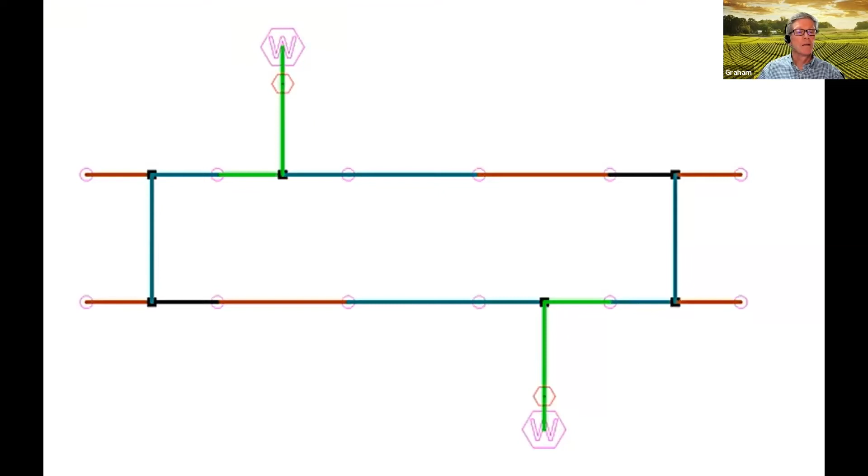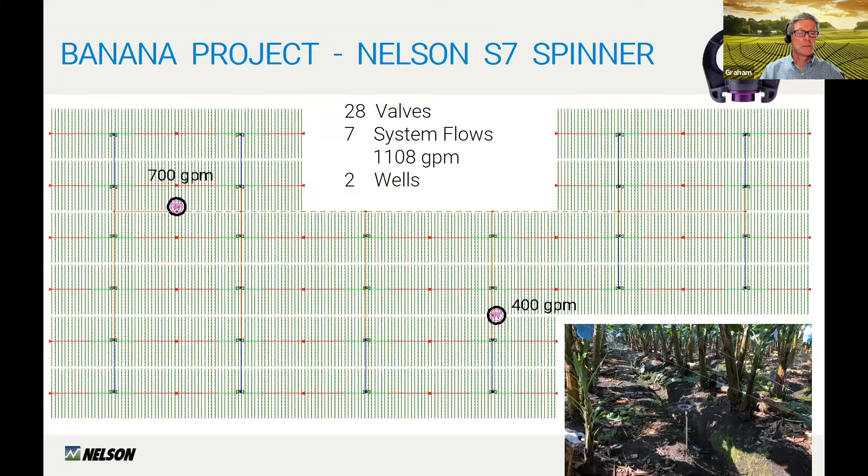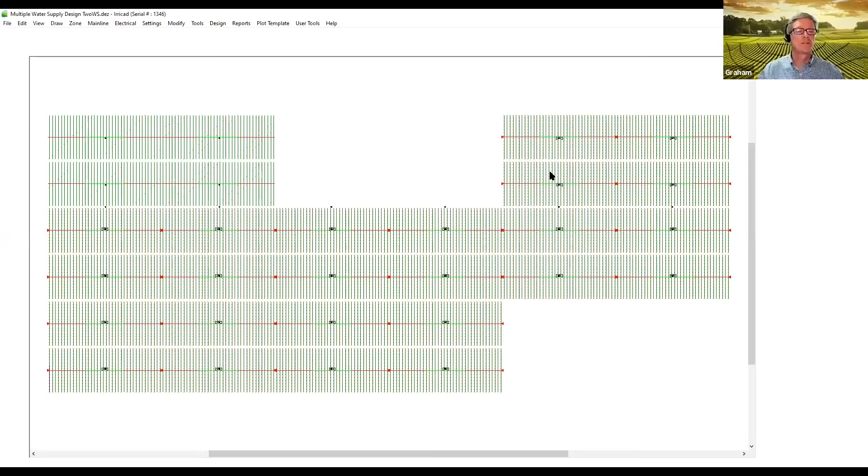Today, we will look at a different example, and this is a banana irrigation project using the Nelson S7 spinner. It has 28 valves. There will be 7 system flows. Each system flow will have a flow of about 1,108 gallons a minute, and it will be supplied by 2 wells, one 700 gallons a minute and one 400 gallons a minute. So we'll move into the IRRICAD design. And so you should now be seeing my IRRICAD screen.

So here we have the design, and the zone design is complete, but the mainline design has not been done. And we can see the position of the 2 wells. I've highlighted them with black circles. And they are wells with different flow capacities and different water levels. The one in the top is 700 gallons a minute capacity, and the water level is 265 feet below the surface. And the other one has a 400 gallon a minute capacity, and the water level is 85 feet below the surface.

I'm going to click on each water supply, and you can see that I've fixed the pressure at 35 psi. And when we have more than one water supply in a system, we cannot use the calculate pressure part of IRRICAD. We need to fix a pressure at each water supply so that the system can analyze the results. And I'll look at the second water supply, and you can see that this is also fixed at 35 psi pressure.

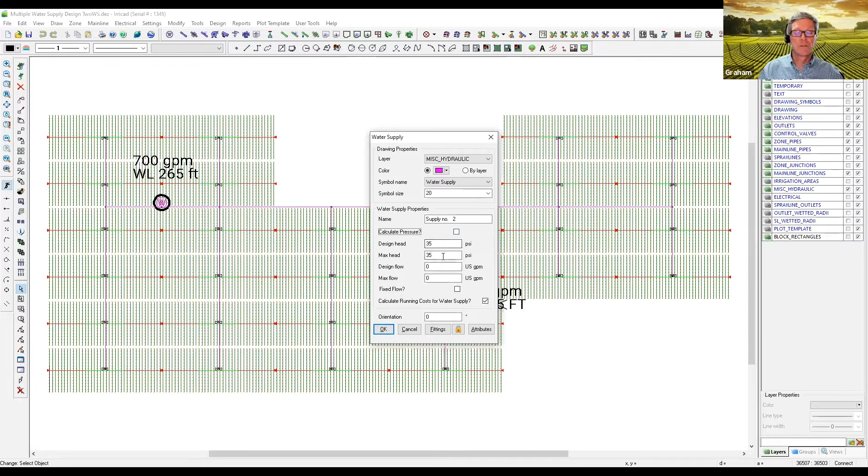Also notice that the fixed flow fields are blank. When you're obtaining diameters, getting a design from IRRICAD, we cannot use fixed flow. That is for analyzing the system. So we have the pressures fixed at 35 psi.

In the design menu, I'll go to the zone design configuration just to show you that the downstream valve pressures have been set to 28 psi. So with a little bit of friction loss above the valve, we will need approximately 29 psi upstream of the valve for the mainline design.

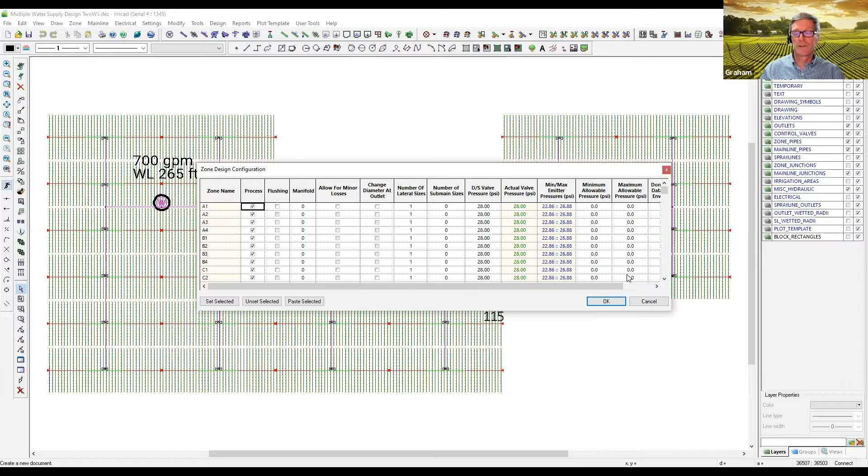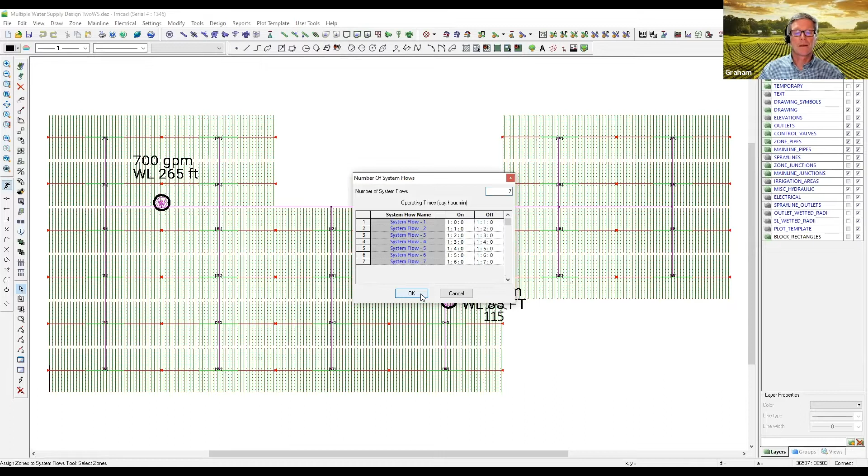So now we need to tell IRRICAD how this system is going to be run. And we're going to do that in the Assign Zones to System Flows menu. And we will say that there are going to be 7 system flows. So now we have the ability to click on the different blocks and assign them to system flows.

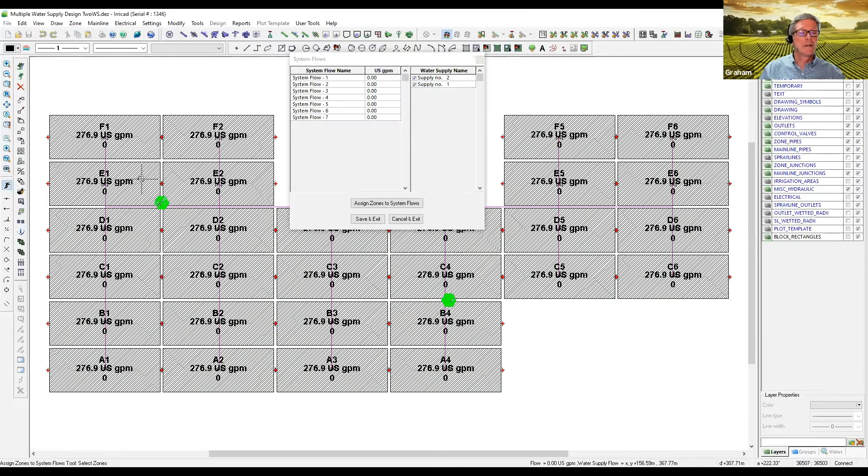You'll notice here that there's an option to click on both of the water supplies. This is new in version 19, and it saves having to click on the water supply icons each time. Sometimes the layout is a little bit congested and it's difficult to click on those icons, so now we can just click on them here. And so I'm going to select 4 blocks with those 2 water supplies checked and assign them to system flow number 1.

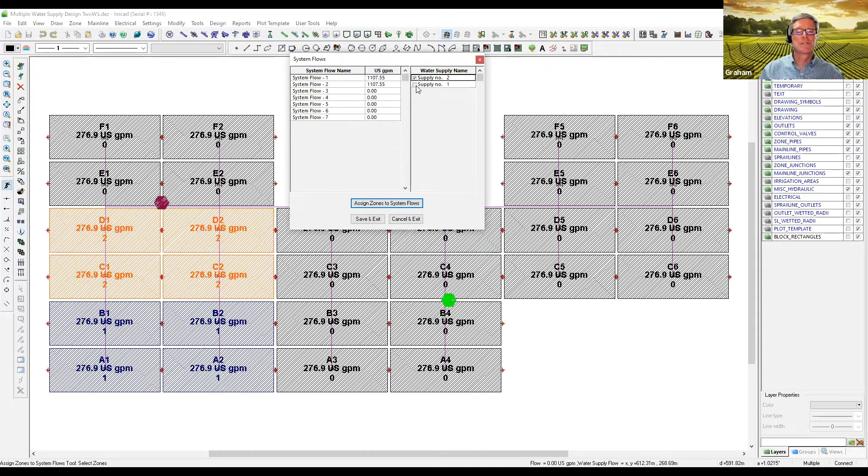Activate the system flows again, and then click on the next 4. And in this way, we will create the 7 system flows. Naturally, you could spread the blocks around, but in this case, the grower wanted to have contiguous blocks so it was easier to manage. Makes the main line a little bit more expensive, but it makes the management much easier.

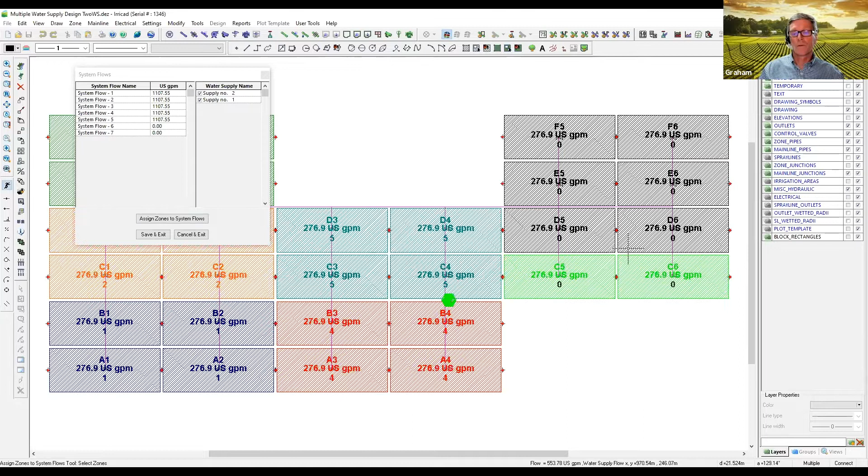System flow 3. System flow 4. Move our dialog box over a little bit, activate the water supplies. System flow 5. System flow 6. And lastly, system flow 7. So we have 7 system flows with 4 blocks each. And you can see the flow is just over 1,107 gallons per minute with each system flow. And so we can save those and exit out.

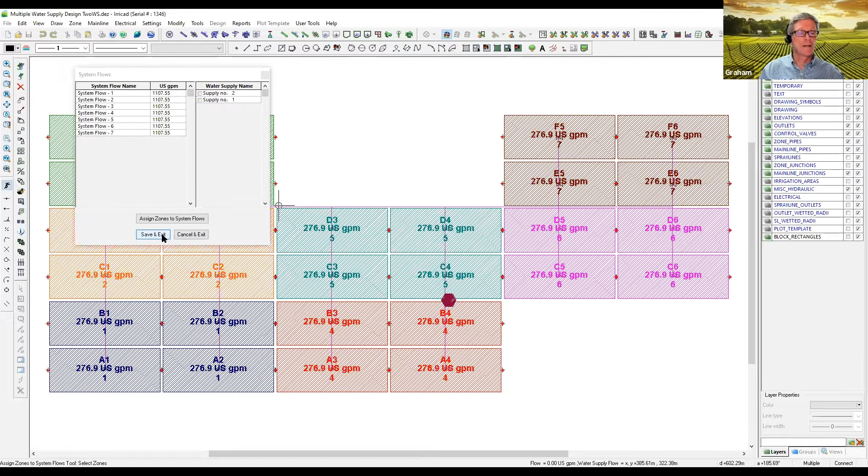When we've got more than 1 water supply, you can have multiple water supplies connected to a system. The options for design are to use velocity design when you obtain pipe sizes. The LP is an option when you have 1 water supply. When you have multiple water supplies, the option is to use velocity design, and that's what we'll do now. So it's sized the pipes, and we will look at the reports to see the distribution of flows in the main line. And we'll look at the system GD report.

You can see that for each system flow, this is from supply number 1, system flow 1, and this is from supply number 2 for system flow 1. The flows aren't really proportional to what we would like. We're really aiming for 700 gallons a minute from the first well and 400 from the second well. And for the first 3, we're close to that, but still high. And for the next 4, we're low, way too low. And it's the opposite for the second water supply.

And while we could tweak the pressures to maybe reduce the pressure in water supply 1 to reduce this flow here, it would also reduce the flows here, which is not what we want. So let's have a look at the design. And for the most part, the pipe sizing is okay. This water supply obviously is going to service 700 gallons a minute here and 400 here. And this water supply will service 400 here. We still really need 1,100 gallons a minute over here. And so to get more water going this way, we need to increase these sizes.

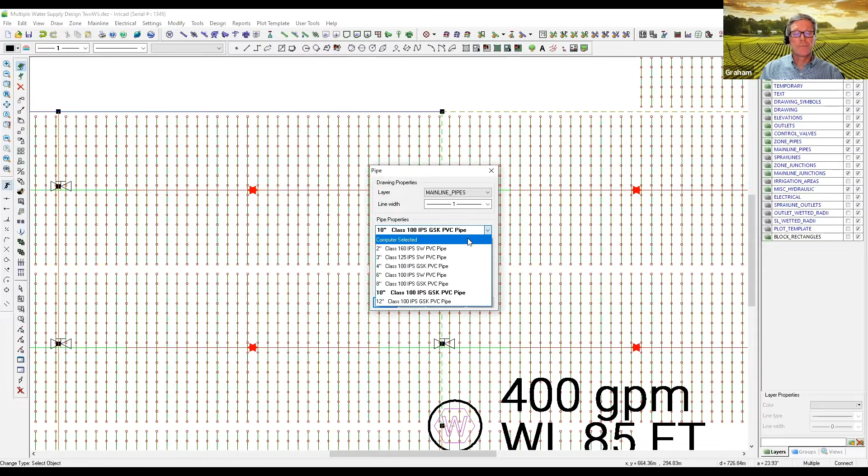And we can see this is 6-inch, which is probably going to be too small. Also, we've got some 10-inch pipe going up from this water supply, and because we only want 400 gallons out of here, that's probably too large. So what I'm going to do is manually change these segments of 10-inch and make them 8-inch. So we don't need 10-inch pipe coming up from here when we're only supplying 400 gallons a minute. And likewise, I'm going to change these segments here to 10-inch because they are too small.

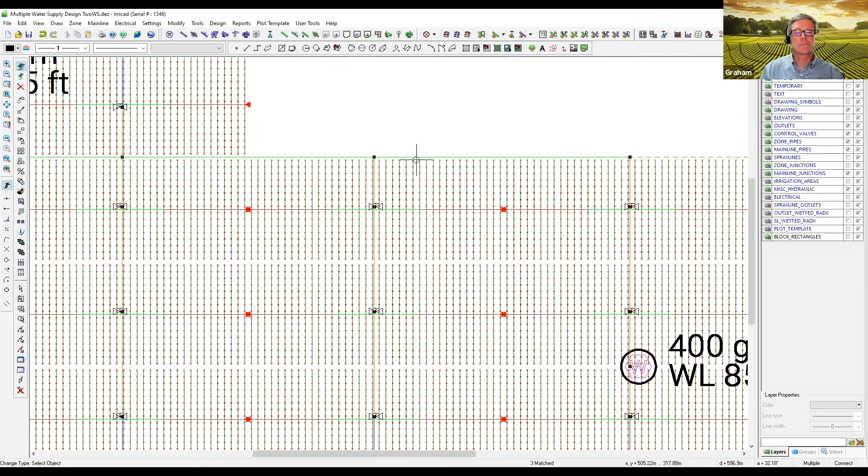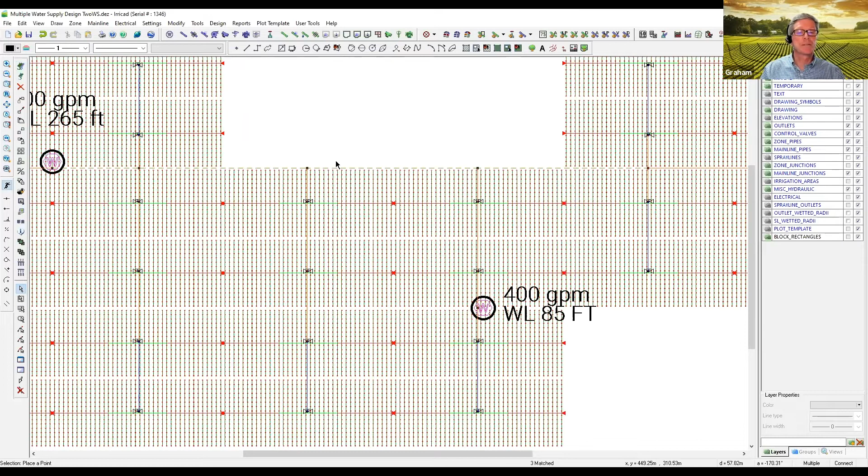In the Change Type tool, I did select several different sizes, so I'm not going to match on the pipe size. I'm just going to change it all to 10-inch. And there we have 10-inch going across there. The next thing I'm going to do is go back into this water supply and use the new fixed flow feature in version 19. And I'm going to set the flow to 700 gallons a minute. So notice when I activated fixed flow, calculated pressure came on, and the pressure that we set grayed out. It's not going to use these pressures anymore.

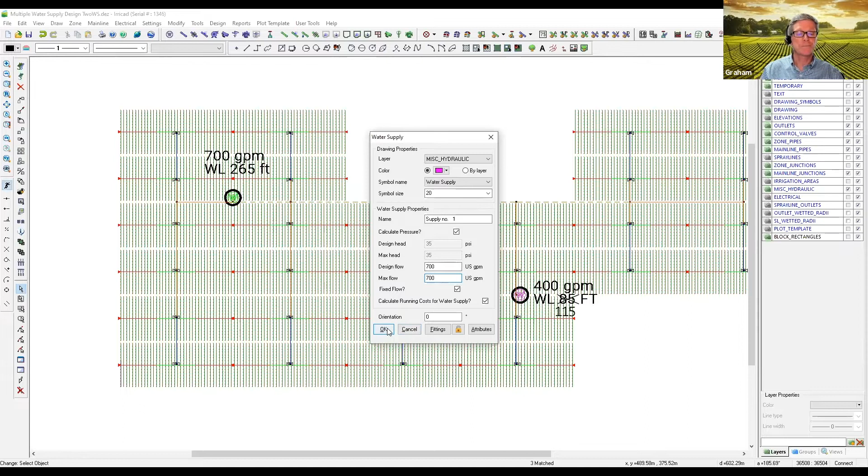The release notes in the help file have some really good notes on how to use this fixed flow. It's a sort of thing where you can fix this one and have this one variable, but you can't fix them both because if this is fixed, then it can vary this one a little bit in flow, or if this is fixed in pressure, it can vary the pressure here, which is what we're going to do. So now we have fixed the flow at this water supply, and now we're going to analyze the design. We're not going to design it again. Fixed flow can't be used to obtain pipe sizes, but we are going to analyze it.

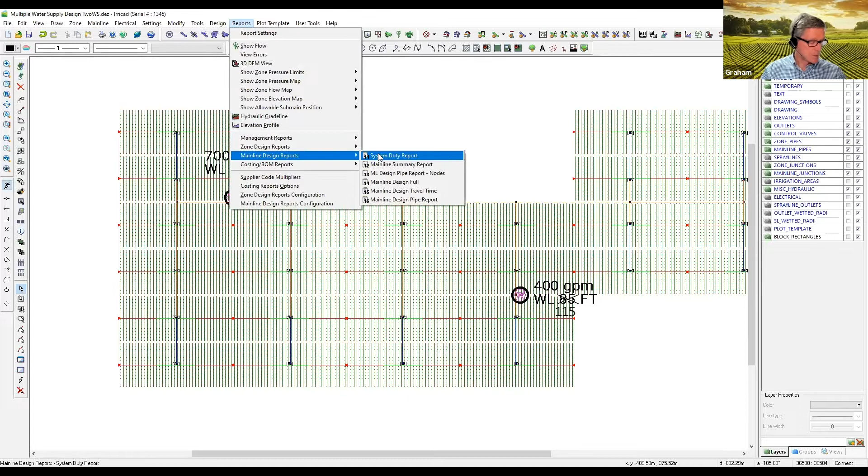And then we will look at the reports. So again, mainline design reports and the system duty report. And we can see that now from water supply number 1, our flows are very close to 700 gallons a minute. Our pressures vary a little bit, and that's by necessity. Water supply number 2, the pressure is fixed at 35 psi, and the flow varies a little bit. But both of these are very close to what we want in terms of what the wells are capable of producing.

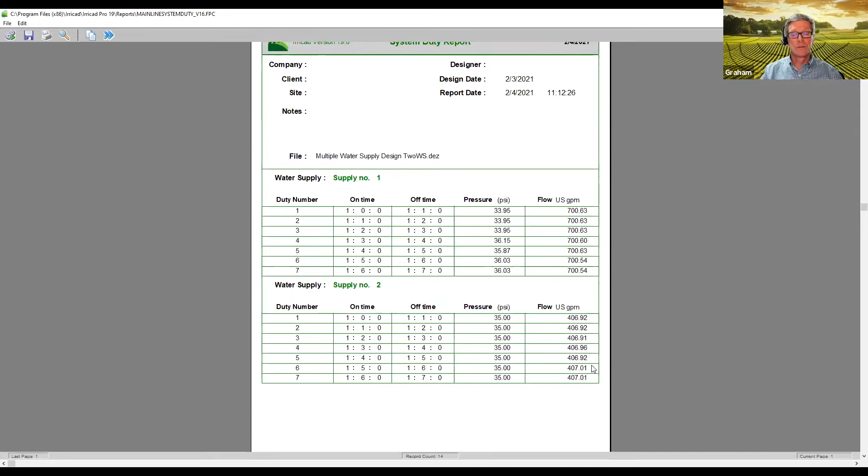So I think that looks like a good result, and we can go from there. So the fixed flow tool in version 19 is a really useful tool in getting to a solution fairly quickly. The method is to design by velocity, and then change one of the water supplies to fixed flow, and change some pipe sizes as you wish, and then do an analysis. If you have, say, 5 water supplies into a design, you could fix the flow on 4 of them, but one of them has to be floating.

One thing to realize is that this gives you a really good solution on paper, and it gives you a design according to what you want. But the variability that we got after doing the velocity design is the potential variability that you'll get in the field. And so you need a way to fix the flow in the field. And the Nelson pressure sustaining valves or rate of flow control valves are excellent ways to do what we just did with the fixed flow option in IRRICAD. Out in the field, the sustaining valves and rate of flow control valves will help fix the flows in the wells in the field.

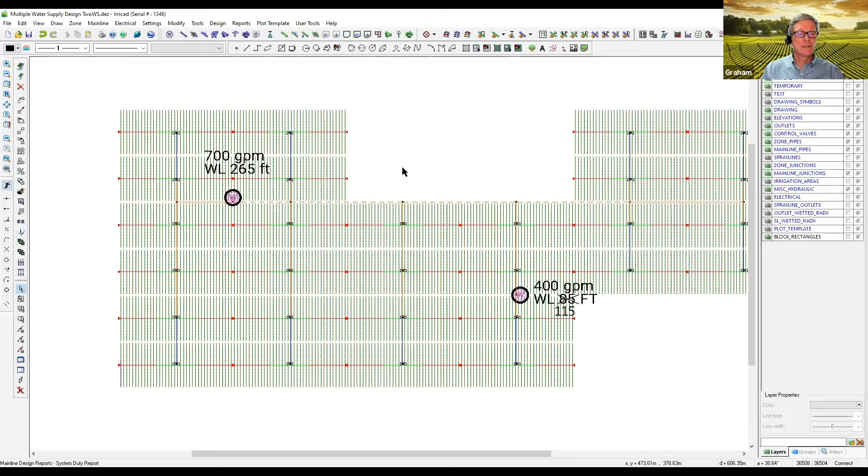So we've arrived at a good solution, but we haven't really taken into account the water levels in the wells, and we haven't allocated pump curves. So what we're going to do now is add a couple of pumps, and in the design menu, in the mainline menu, under pumps, I'm going to select a pump. And you really do have to study this a little bit and make sure you've got some pumps in the database that are appropriate, and if not, enter them into the database, because if you put pumps that really aren't going to operate well into the system, it's going to tell you very quickly.

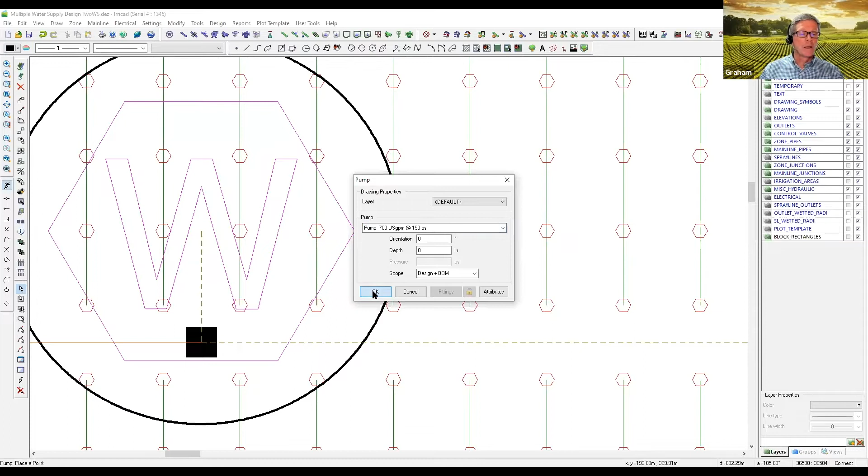So for this water supply, I'm going to select the 700 gallon a minute pump, and I'm going to place it downstream of the water supply. The next thing I'm going to do is actually change the water supply a little bit. I'm going to remove the fixed flow option, and I'm going to set the pressure, but I'm going to set it to minus 115 psi. And that replicates the 265-foot depth of the water level. That's equivalent to 115 psi. So basically we're telling the pump artificially that it's 265 feet down in the well, and we're doing that by setting a negative pressure.

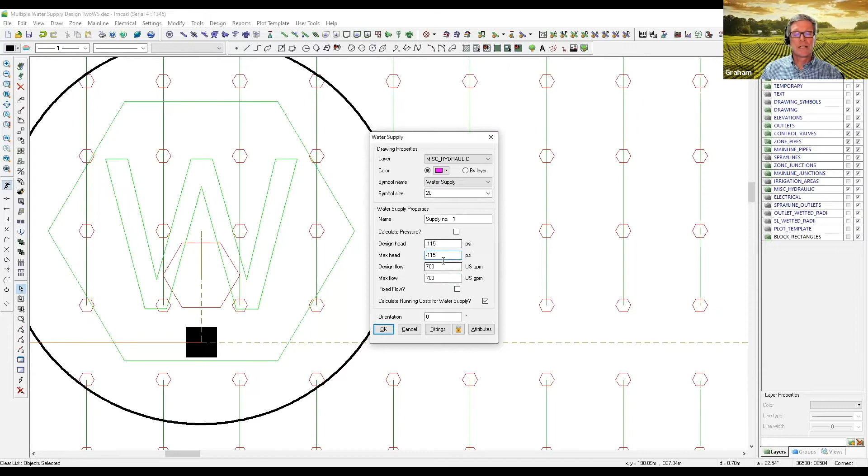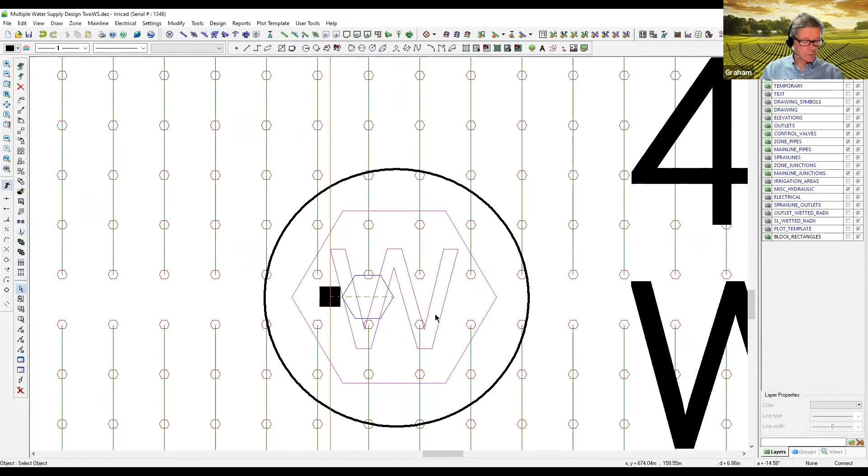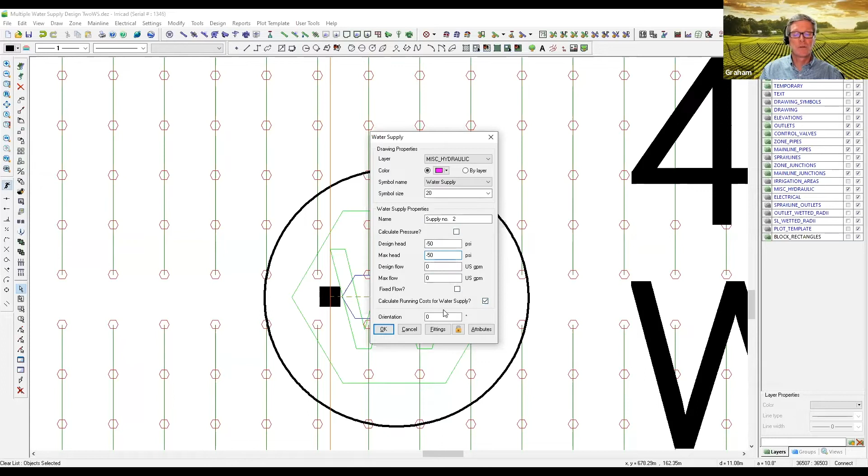Going to go to the second water supply and do something very similar. This time I will put in the 400 gallon a minute pump just downstream of the water supply. And again, I'm going to edit the water supply. And this time I'm going to tell it it's minus 50 psi, which is equivalent to about 115 feet of water level down in the well. And the calculate pressure option is not there, and the fixed flow option is not there. So now we can run the analysis, not a design, an analysis.

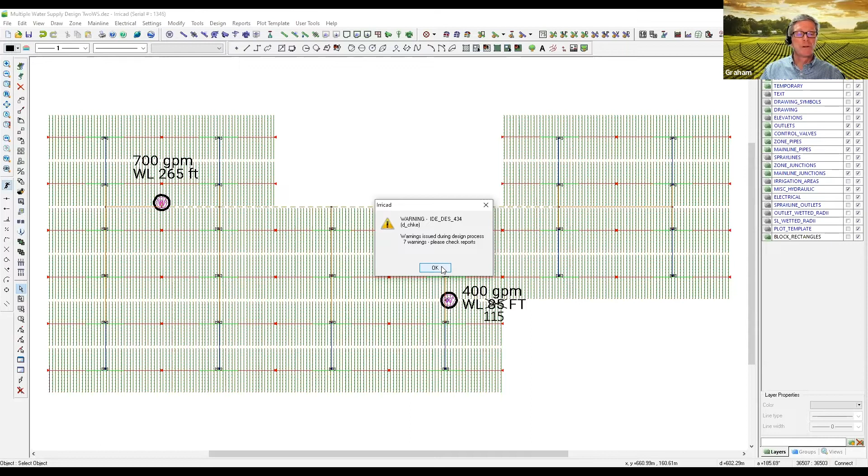IRRICAD's going to give us some messages. Number one, it says, be careful, don't place pumps in loops. We can imagine if we put a pump in a loop, it would not be a good thing. It gives us a few messages with minor network imbalances, but the imbalance is decimal psi, so we're not going to worry about that. And then it's going to report to us that there are negative pipe pressures detected, which normally would be something to really watch out for, but we know that those negative pipe pressures are between the water supply and the pump, and those little pieces of horizontal pipe are actually vertical pieces of pipe going down to the water level. Now we can go to the reports and the same system duty report.

And we can see that here we've got our negative pressure, minus 115 psi, which is equivalent to 265 ft below ground level. And we can see that our flows vary a little bit. The pump curve that was used to create the pump in the database is replicated mathematically, and IRRICAD knows it has to stay on that curve, and it does that with each water supply, and that's what restricts it.

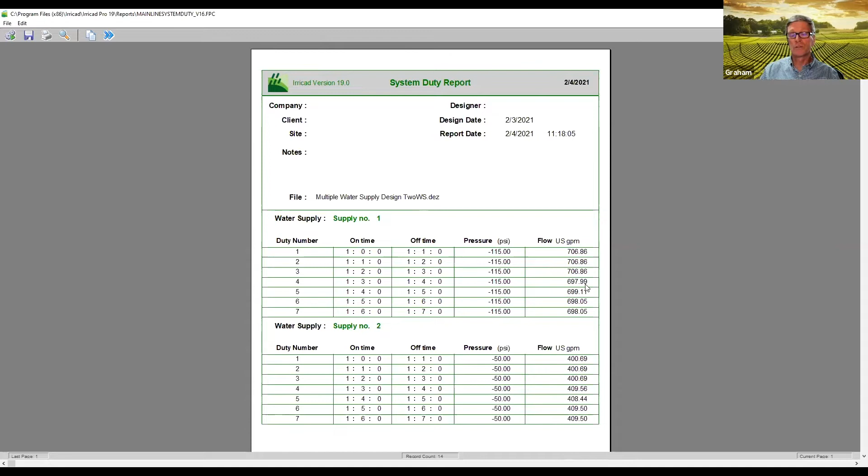We haven't restricted the flow with the fixed flow option. We're restricting the flow by making IRRICAD stay on the pump curve for each of those pumps, and it's done that very well. So that's a really good tool. And again, it can work with single water supplies, or it can work with multiple water supplies. Not just two, it can work with more water supplies.

Another report that I find useful with any mainline design is the mainline summary report. And this report shows us what we need upstream of the valve. Remember, the downstream required pressure was 28 psi, and according to the friction loss through that valve, we need 28.8 upstream of the valve. And this is what is arriving. So we've got a margin over what we need, and these are the flows here, 706.9 and 400.7. These are the flows that are coming off both pumps.

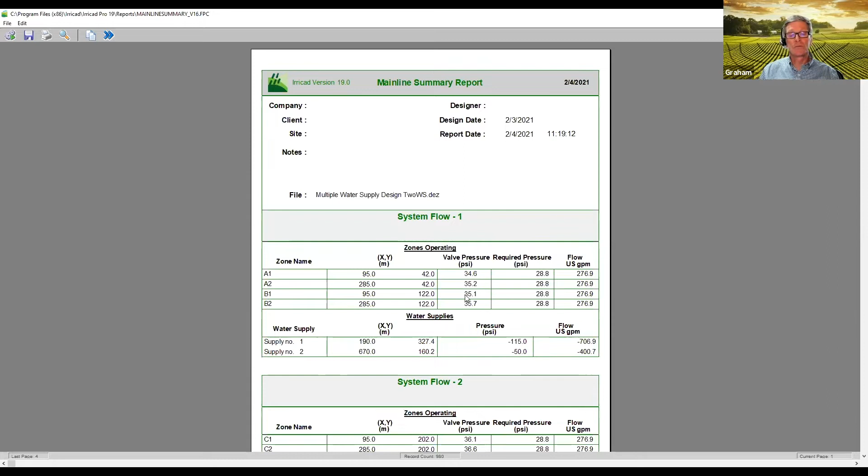And with the flows coming off those pumps and the points on the pump curves, this is the pressure that's arriving at the valves for system flow number 1. For system flow number 2, let's look at number 3. The flows are a little bit different on the pumps. Pressures are a little bit different because the distances and the friction losses are a little different. But you can see for each of these system flows, the things are balanced pretty well. The flow off each pump is fairly consistent, and we've got good pressure, marginally above what we need on each valve for each system flow.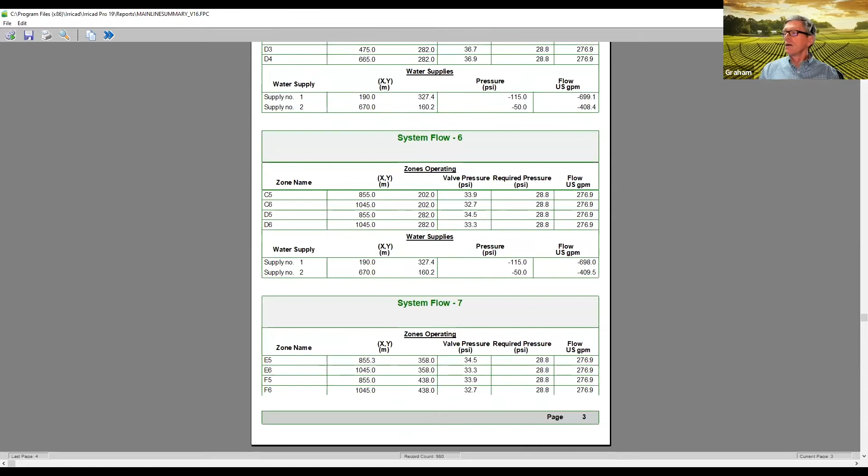So that's a fairly quick overview of how to do multiple water supplies using velocity design, then fixing the flow, which is a new feature in version 15, and then on top of that, adding pumps and making IRRICAD stay on those pump curves for both pumps.

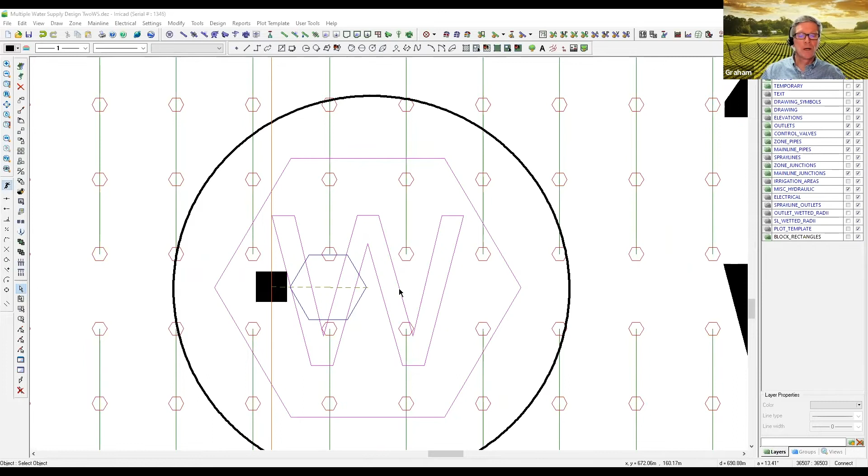So 115 feet, if I did my math correctly, in head is equivalent to 50 psi, and so if we look at the water supply, IRRICAD doesn't give us the option of putting a pressure there in feet, or a better way to put it, for the design that I'm doing, I've got my units of pressure set to PSI, because I want to see sprinkler pressure and pipe pressure in PSI. So I translated 115 feet of depth to the water level to PSI and put that in there, feet to PSI.

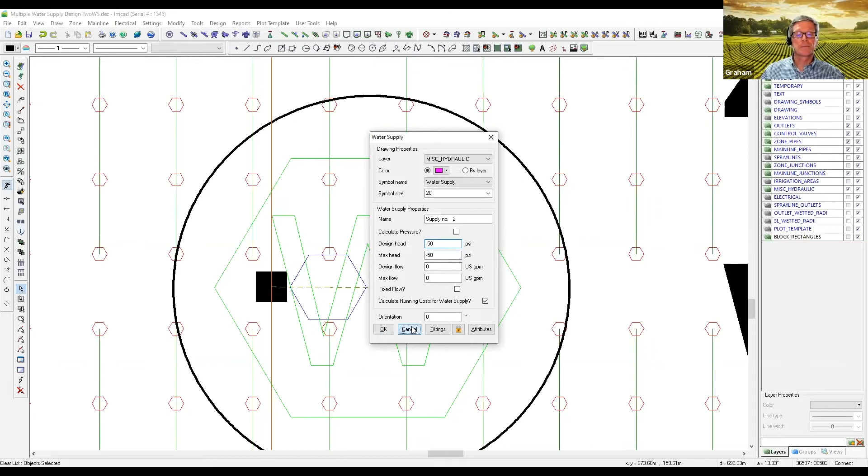Great, Graham, and sort of relating to that: when you're creating these pump curves and you've labeled your pumps for 700 gallons per minute or 400 gallons per minute, is there a range that would be appropriate for those pump curves in the database, so it's not so specific in the label, that could be used for a variety of pump flows and pressures somewhere along the curve of a pump? Sure. Let me open up my database and I will share that.

So now we should be seeing my database, and on the top there is the pump for 400 gallons a minute. And I put 400 gallons a minute at 85 PSI, which is the best duty point for that pump. So it gives you an idea. Down below, you have the option of putting a minimum flow and maximum flow. And that's a really good idea to put in the database.

And so if you do use that pump where it's not applicable, let's say your flow is 800 gallons a minute, when you try and run the analysis, IRRICAD will give you a message that that pump is outside its range. So for each pump, it's good to have a minimum flow and maximum flow. The minimum flow is useful because you really don't want to run a pump well back on its curve. It's not a good thing for the pump, and you don't want to run it too far down the curve because the potential to cavitate is strong, and you may get in trouble with the NPSH requirements.

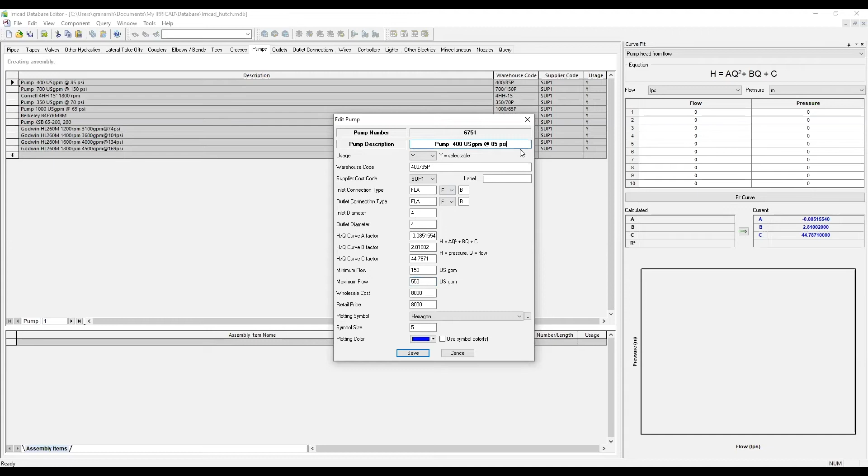So having a label that maybe gives you a range would be fine. We could put in a label there, and I think I have room. We could put in 150 to 550 GPM, something like that. You could put that in the label to help.

Yeah. Great. There's a lot of questions coming in, actually, Hutch. A question here, if we can take a couple more. Sure. I have not heard from the lecture consideration of the area contour profile.

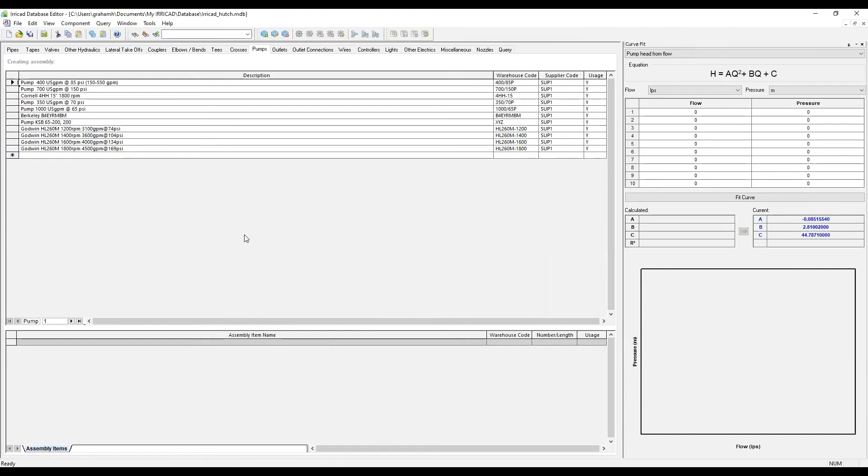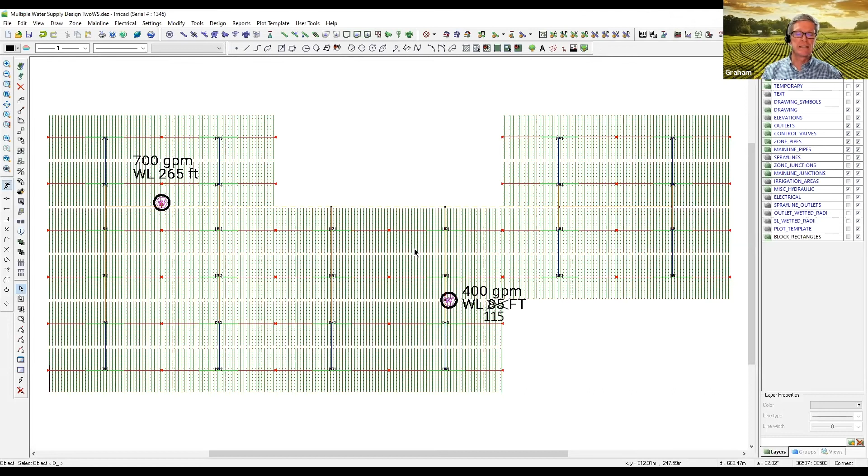Okay. So in this particular design, the elevation was flat. Let me show you the design again. So in this particular design, there was no elevation. This is on the coastal area of Guatemala, and that area is fairly flat. And so we didn't take elevation into account in this design. If we did have contours or elevation information, that information would have been included in the analysis, both of the sizing of the pipes and in the analysis using the pumps.

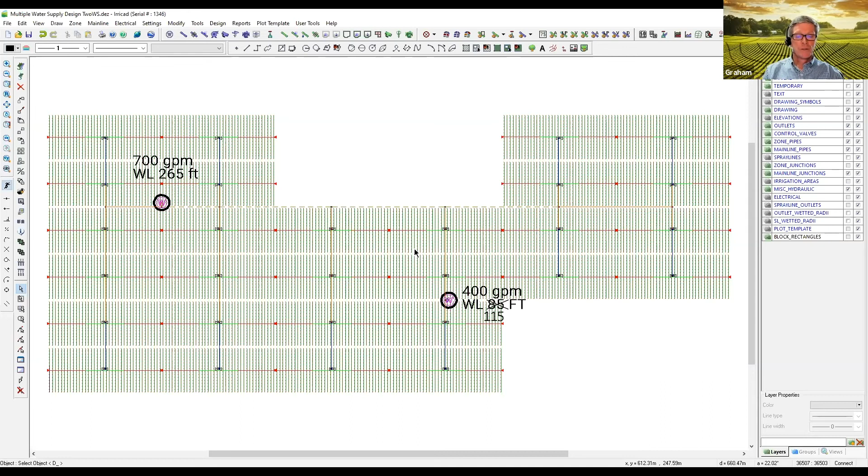Great. And there's actually two more that are really the same, in regard to friction loss in the pipe column coming up the well. Okay, that's a good question. The pump curve is taken directly off the information from the pump manufacturer. And so it doesn't include any headworks loss or column friction loss, anything that goes on in terms of friction loss from the water level to the main line.

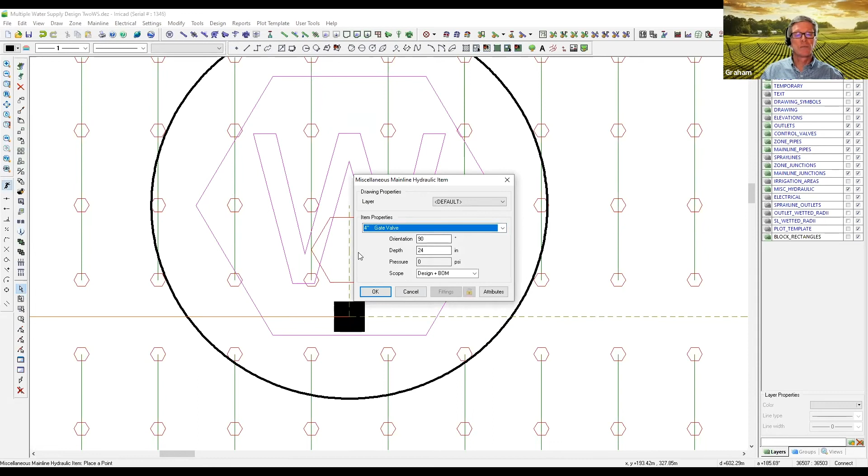If that's significant, it may be a good idea to go into miscellaneous hydraulic and select something that has a friction loss that you can put in there. I could put in a 4-inch gate valve or something like that, and put it downstream of the pump, between the pump and that first junction.

Does adding additional negative pressure to your pump help accommodate or account for some of that? That's a very, very good option, Steve. If you think there's another 10 feet equivalent of loss in that whole system, then you could put the pressure at minus 125 instead of 115. That's a really good way of adding a margin.

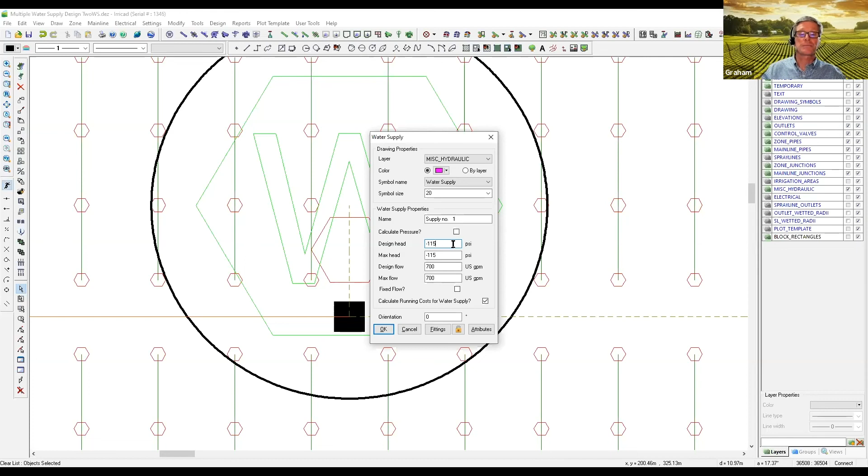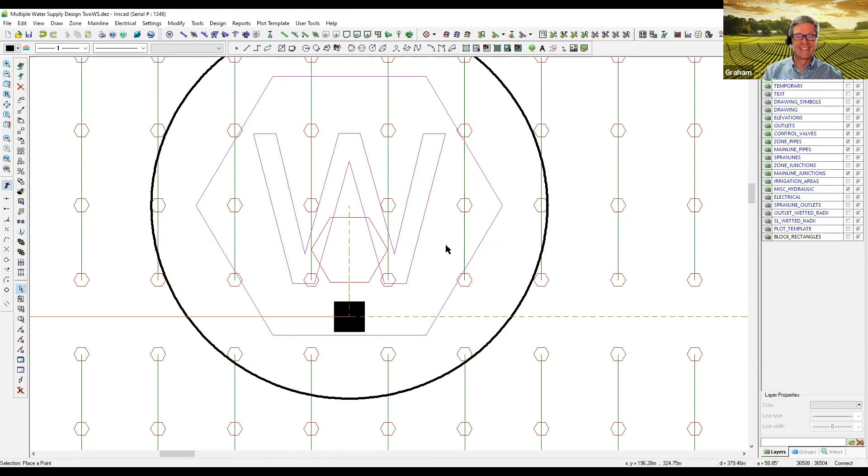Okay. The last one, we'll save for a future webinar, maybe next season, but it's a person asking for more topographic information in a banana example. They're not familiar with any flat banana plantations, so they look forward to seeing some with elevations. Yeah. Okay. Great work.